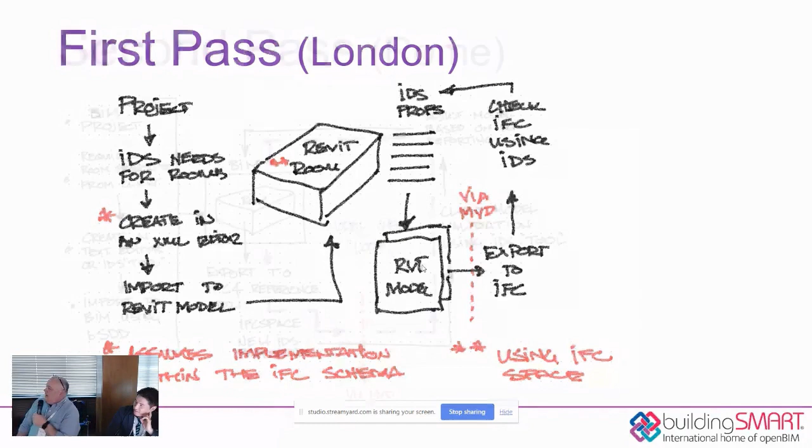Let's do a class, I said, okay, I'll do a class. And then later he's like, well, what are you going to do? Because we got a bunch of IDS classes, so it's got to be really good. And I'm like, well, it's going to be really simple. So...

I took another shot at talking with people at the conference. I went to some of the master class sessions. Mirbek and I have been talking, Leon and I have been talking. And so I kind of came up with a second pass at this sort of workflow that I would give to someone who sits in my office to explain what it is we're trying to do with this IDS and bSDD workflow using IFCs and MVDs. And if anybody in here knows more than I do, which is probably most of you, and you want to comment or correct me, feel free. I have thick skin, I don't care. So let's look at a few of these pieces.

So you can go to the next slide there, Mirbek. Excellent. So at the very inception of this, I've got some model in an authoring tool. It's, you know, where I come from, I'm using Revit, but it could be anything. So you've got your project, and then I made this.

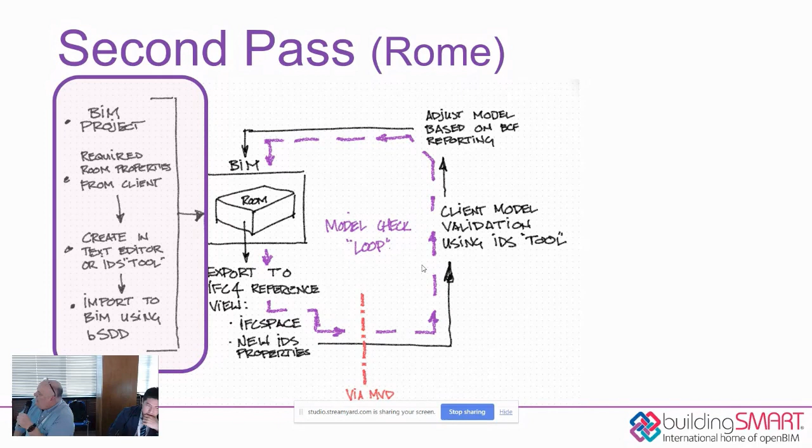Boy, it's almost too hard for me to read from here, but I should know it. The first one, I'm going to stand up a little bit, right over here.

So the first ones are just the required room properties that we might get from a client. They might say to us, we need these things. Mirbek's got a bunch that he's already put in there. We're doing our examples using IFC space, so a room from Revit, which we map to IFC space when we export. So they might come to us and say, we have all these requirements for your room, we need to make sure we're getting all that data in, and then you need to give it back to us so we can check it.

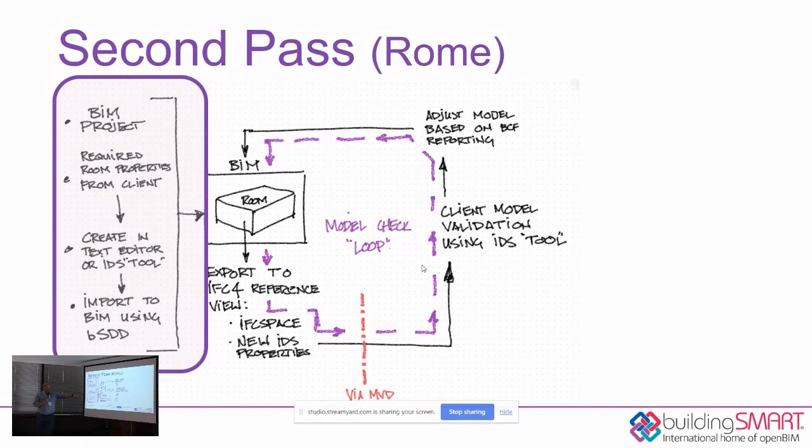So we can create that in a text editor or an IDS tool - I'm using air quotes because there isn't really a tool yet. We've talked in other sessions that there are some kinds of tools starting to be made. I tried to download one the other day, but it's only in Dutch, so I couldn't use it because my Dutch is so bad. And then we use bSDD to import that into the authoring tool, so we get those parameters in there so we can start to add those things.

You can go to the next slide. So we've got our model there, and that model contains one or more rooms. Are we doing a kitchen, or just a space? We're doing a space that's a kitchen? All right, we're just doing a space.

Yeah, so from there, next slide - we export this through IFC4 reference view. I put in IFC4 back when we did that, but for today's example we use 2x3 coordination view. That would export all of the standard kind of IFC properties and some of the new IDS properties that we might have gotten from the client. So those come out, and we export those via an MVD of some kind.

So we've got all these different MVDs, which are again a subset of IFC, and those go out to our client, who then takes that model and validates it using some other tool, some IDS tool. And then we create a loop - we take that BCF report, in this case put it back into our model, make amendments, make changes, and keep doing this loop until things get resolved.

I think when Menos was talking, he said he does all the modeling, all this stuff himself, and he did it like four or five times over the course of a project, just to get that thing through again and make sure everything they're tracking is correct. In this case it's rooms, but whatever we're tracking is being continually checked throughout the life of the project.

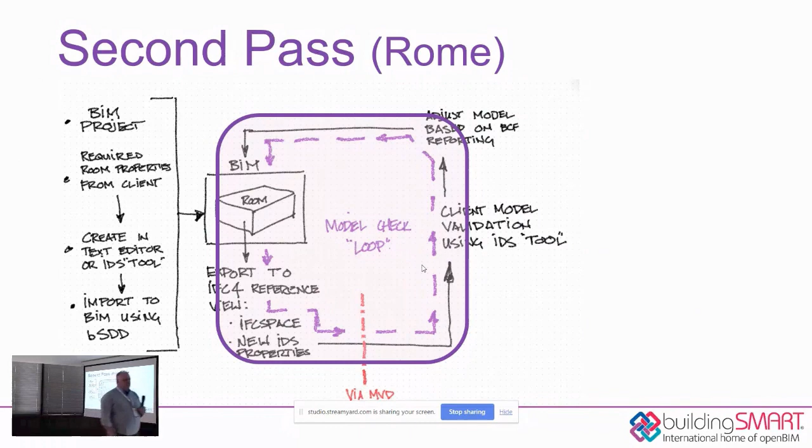So what else we got? Oh, what? It's like Mirbek time. While he's doing that, did anybody have anything they wanted to add? We've got a traveling mic, Artur, or anybody who wanted to talk. The last thing I want to do is put out information that I think is right but isn't.

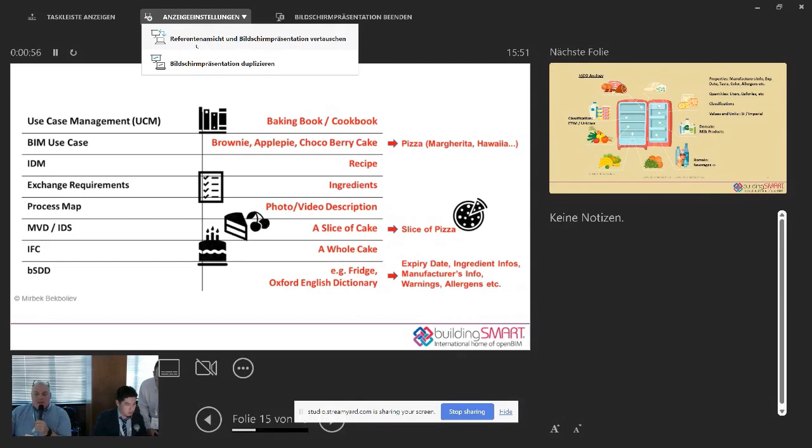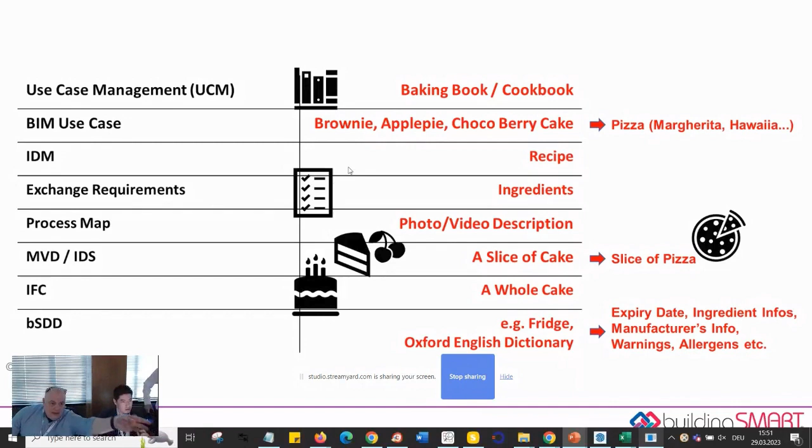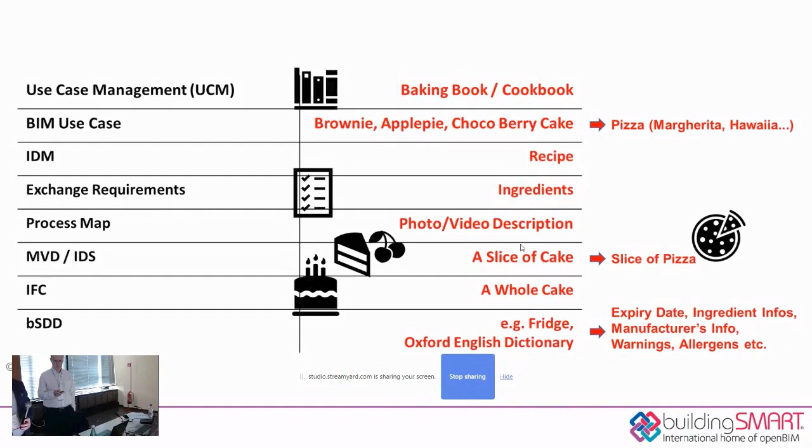Yeah, please, thank you. Okay, I don't... but what? Maybe I'm working on it. Okay, sorry, and not on BSDD, but yeah, I'm the BSDD new product manager. All of you said more or less, yeah, this is what it is. Yeah, this is correct. One comment just to avoid confusion in case somebody understands it this way - yeah, BSDD is supporting both IDS and IFC. It's not like a tool to bring this IDS content to IFC, it's a reference library where you can put meaning. But yeah, I just wanted to add this to what you said.

Yeah, all right, so thank you. You want this one? Yeah, I think we can use it for question and answers. Okay, I'll do the Q&A. It's muted. Okay, so shall I also get up? You can simply press this one. Okay, I can. Strange way. Okay, so I don't have to introduce myself.

You already did. So yesterday I had a chance and honor to join Artur's masterclass meeting where everyone presented their examples.

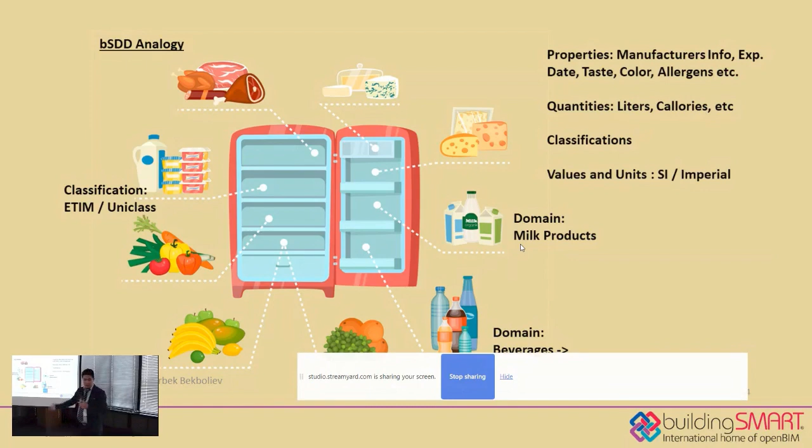So I took a chance to merge that was David's idea and bring the additional step I had. I will simply repeat again. Can you go back once?

So you already mentioned what these acronyms mean, and now I will give you an analogy for all these acronyms. In Italy, we all love cooking, and in general everyone loves cooking. This is the easiest way to understand.

Why we need some use cases: I will show you one specific use case that we will discuss today, and we will try it on one model. This use case is like a recipe, right?

Your recipe, you need to know how to model, you need to know your ingredients. In case you bake a pizza, you definitely know your model, you definitely know your processes. All the processes should happen in a timely manner. Imagine you forgot your pizza in your oven, it will burn out, right?

It's the same way like in a construction site, you pour your concrete, it should be in a timely manner. How much, at what time, who is delivering that, the processes should be the same way. So all these ingredients, you can simplify and explain to your colleagues, to everyone, even without a technical background.

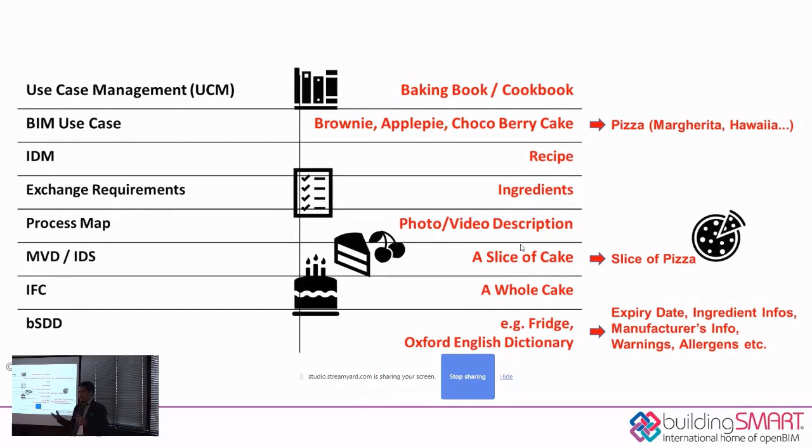That's the simple thing. We had a task from Artur where he asked what we understand as bSDD, and that was the next slide. I understand bSDD as a fridge. He had, I think it was a blog, right? I think it was a blog. It gave a real cool example of how to use bSDD with apples.

So it's like vegetables and fruits, a domain. If you have a domain vegetables and fruits, then they belong to a fridge, right? Not everything, but a domain like dairy, a milk product, will definitely be stored, unless it's a different type of milk, but you have some domains you can definitely specify.

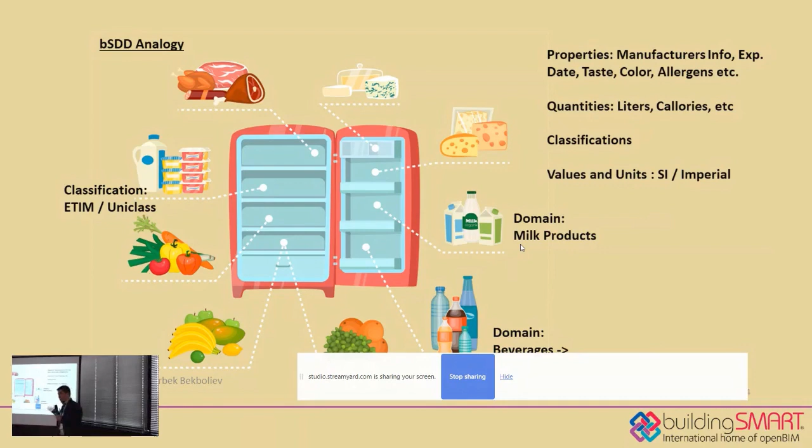And all that specification, you have properties, right? Milk products have an expiring date. If you use it later, maybe you'll have stomach problems, but still, all those objects, also in the construction industry, you have your specifications, your properties, your classification, and that's what we're going to do now, and the display.

We were inspired - myself, Gianluca, Genoa, Jeff Roulette - we had a chance to present one use case last time in Montreal, previously describing what we were focusing on with BCF, how to use BCF for a specific reason. Today I extended that with bSDD. How do we bring all these things together?

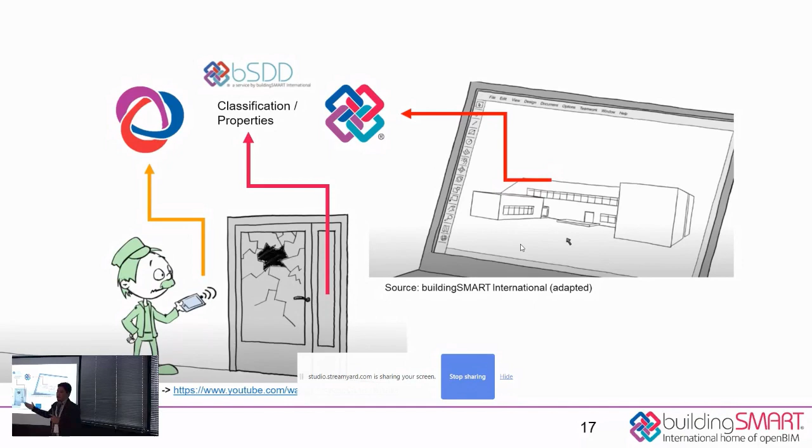And then you can track, of course, you put your PDTs. If you have PDTs, you can use that directly and say, okay, actually I don't need that kind of door anymore, I can choose another door from another manufacturer, and I can put a specification and open a tendering if it's a public school, whatever. So that was an inspiration.

Now next, you can use IFC 4.3. It's a new one - I just want to let you know, if you've heard many times, there were even sessions on IFC 4.3 - that currently, all that new information is stored also as a domain in bSDD. You can find it, you can map it.

And now I will give you a real example, let's start with an example. We will take an example - this is a use case we published recently.

Feel free to go - I think this is, can you press the hide there? Just give me a second. No, go back, there's a control. Oh, that was not a good idea. No, I don't think so.

Okay, so this is a use case with addressed BCF, using it for sustainability consulting.

There's small companies or small individuals even, trying to bring all that together for retrofit projects. Why? Now explaining why retrofit projects. Worldwide, how many buildings are already built? You need to renovate them, someone to retrofit them. And of course, some initiatives, government and international organization initiatives, are trying to bring them forward with incentives.

Next slide, please. Next. Yeah, now this is a case where I was specifically using air tightness. Why air tightness? Because in many standards building air tightness is very vital. It's 9%. If you improve air tightness, you have a 9% energy efficiency gain just for air tightness. Imagine you have other things like insulation, improved thermal bridge-free construction, and so on.

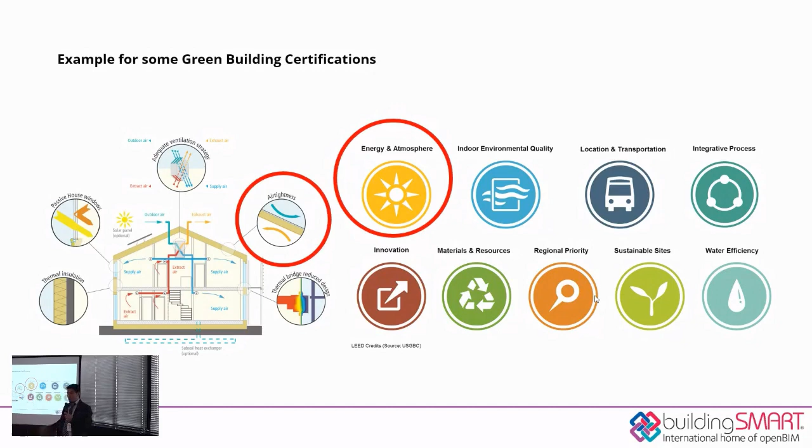And this is for LEED certification. This is a standard, like the passive house standard, local standards. They're everywhere in the European Union. You need to have a blower door test done. In the US, especially for the US Army, you even have a specification. You must do this blower door test.

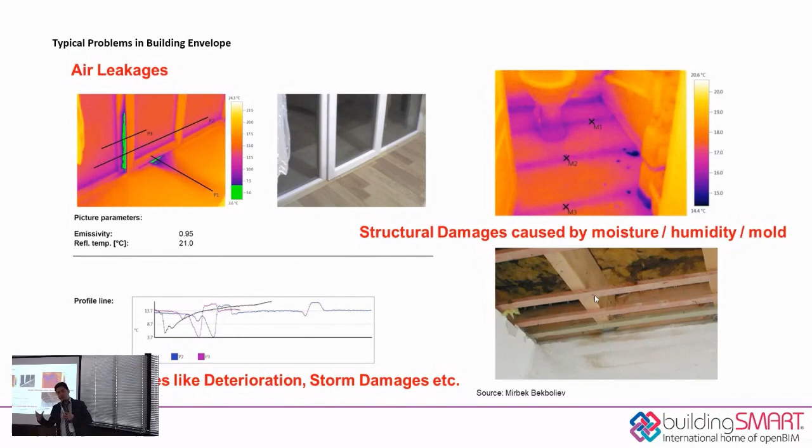Next one. Why air tightness? You see those issues like draft, like mold, simple classical ones. You can document them with thermal bridge cameras. Sorry, thermal bridges with a thermal camera. It's infrared thermal imaging. Yeah, that was a requirement that we stored on UCM.

If I'm too excited and too fast, please tell me. Please count down. Yeah, they go back. All right. Yeah, we have actually. Yes, yesterday I had 15 minutes. That's why, today I have more time, so I will relax now. Whew. I'll breathe. Take your time, Mirbek. We got all the time in the world. Sorry. We got all the time in the world. Just take your time. Okay. If something is not clear, please ask me directly. We can leave it as a discussion. But if something is not clear, I can at least give you some clarity.

So this is a simple requirement: how to perform building air tightness documentation, and what you need to perform a blower door test. And you need not only the blower door test; it's an ISO standard. It's also an EN norm. And in the European Union, you need to do that according to the standard. ASTM, I guess, is a standard in the US that you need. There are protocols like USACE, the United States Army Corps of Engineers. They also have some specific document that I really had to perform once.

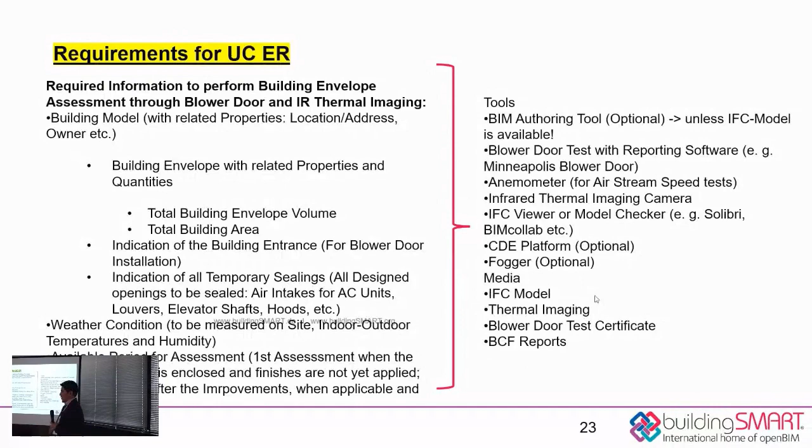Really tough thing. You need to have specific tools like a thermal camera, right? A normal camera, to document them. You need the blower door itself. You need maybe a BIM authoring tool because you need the models. Classically, on a construction site, you go there. What I got, I have a paper. In reality, right? You mark them. You say, I have a problem on the first floor.

That's not the case. So in use case management, we put our simple requirements, like what I need to have, at least to mark my requirements in the model, and where those problems may occur, classically windows. If you look at windows, you definitely need to map them. You have, of course, property sets. You can use them. You can profile from property sets. You have related ones like infiltration. You have the property set condition. You can assess conditions, why they're related, and you have site.

When you go to a site to perform a blower door test, it's according to these requirements. You put in inputs, right? You have your inputs. You have to input the address. You have to register the current condition, weather condition, because it's related: pressure, temperature, and so on. Next slide, please.

And which building, as building criteria, like I said, building use, what the building type is, and space common that we're going to discuss today. Thermal loads might be interesting, because of what loads we'll have, occupancy requirements. Next, please. And of course, the most important for me, really a vital one, is base quantities. I need to know the air volume that I need to push into that building.

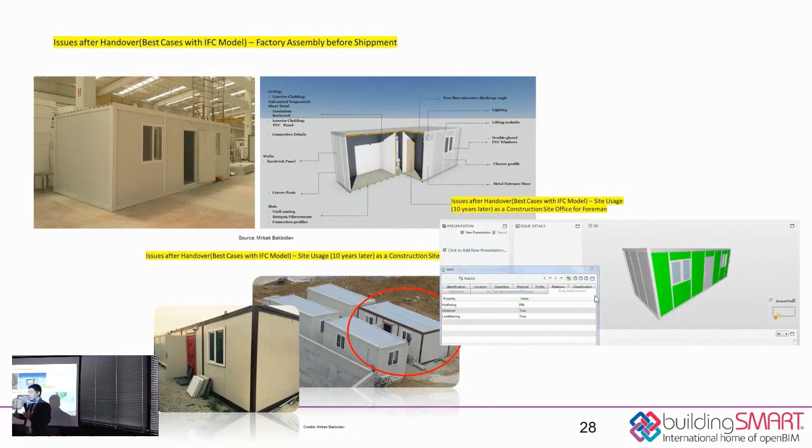So this is a building that we will show later on. As you can see, there's already a blower test installed. We run simulation later on. And this building was, of course, an example, also a real example, a new one on the construction site. That's an interesting point of prefabrication. The current ones, according to new standards, require that you do that blower test already at the factory before it left the building. So with the new standards, you have more opportunities. But the old ones, like 10 years old, will have a lot of issues like this.

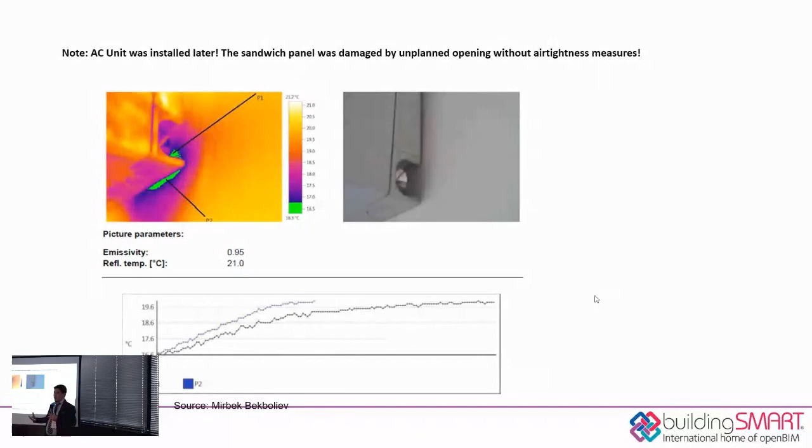As you can see, they didn't have AC units, so they have a lot of workers. They simply drill a hole and put the AC unit in, but they are not energy experts. They forgot to seal it properly. So you have a leakage, and air leakage is money, because you are conditioning that air in the building. It's maybe a hot climate, and it will simply be leaking through, and you spend a lot of money. Same for windows, not the perfect windows, and so on.

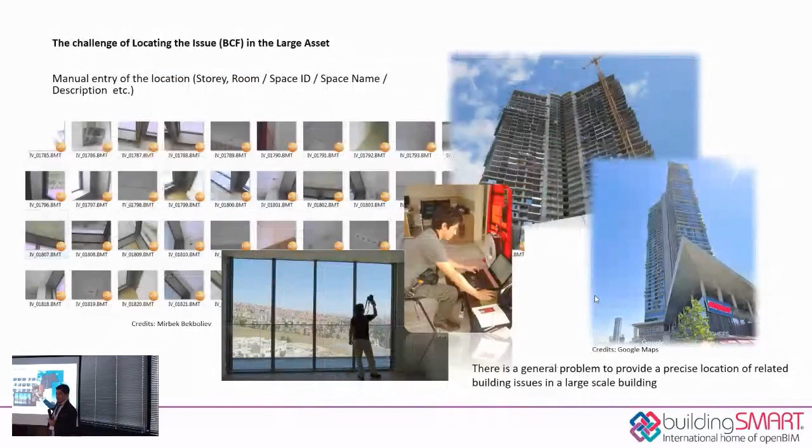Next one. Imagine that kind of building. Wow, that will be tricky to document all that kind of leakage, because even in small scale, it's still tricky. Imagine I did the blower test in 2010, and I left the company, or I was hit by a truck, whatever, right? Who knows where this thing occurred on that building?

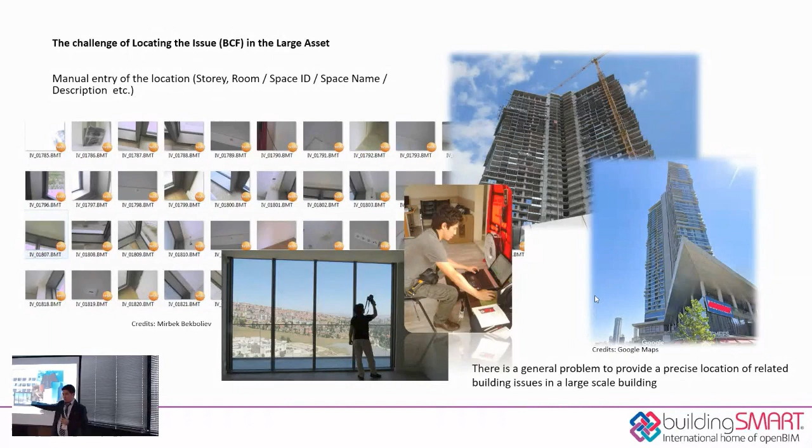Try to document. So the answer was BCF, because with BCF you map it to the specific location, storey. You choose exactly the building material, object. You say this material, or this window, was leaky, and I can directly go to the place and say they had a problem. We can make improvements and document that. So this is theory. Now I'll show you in reality.

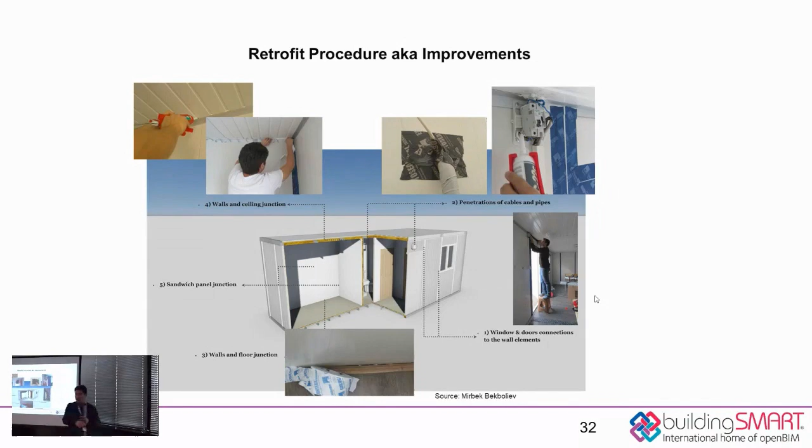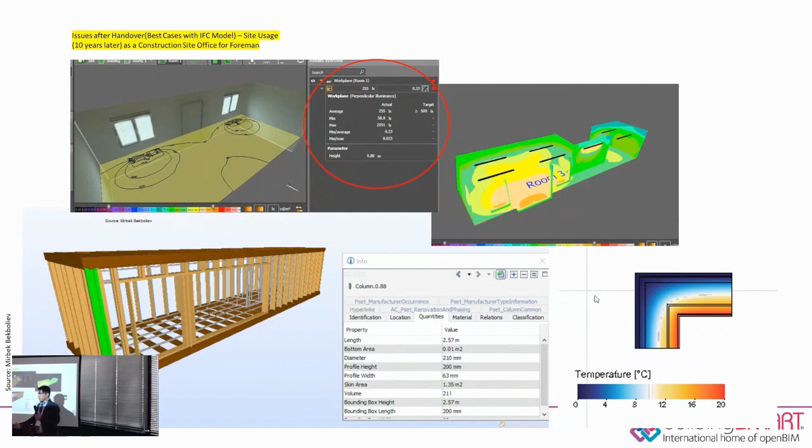Can you maybe install a skylight? Taking into account the skylight should later maybe be protected from sun, since it's a hot region. And you can perform other simulations like thermal imaging, or simply check if thermal-bridge-free construction was really applied in that building.

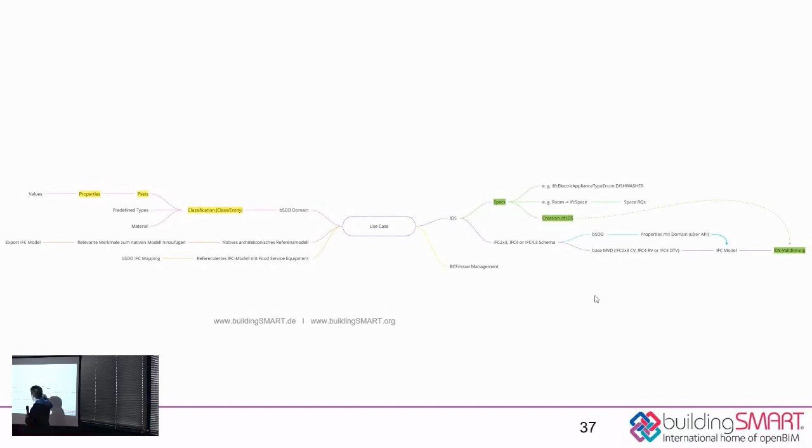So this you have to zoom out. I will not touch anything. I will not zoom. I will explain the workflow he already made, and David already showed you this loop. So this is actually a loop. No, sorry, it's the fancy version. Yeah, I will discuss that. We have the same thing, right? So we said we will bring you through those stages. So we will go now slowly into the next stage.

And I guess there's even a status in bSDD now that a domain has been approved or something like that. Arthur, you can confirm that? You can do it later. Let's do it later. So there is even a badge, I guess, you can check. It has been quality approved. So this is a good thing, because otherwise we have many domains here.

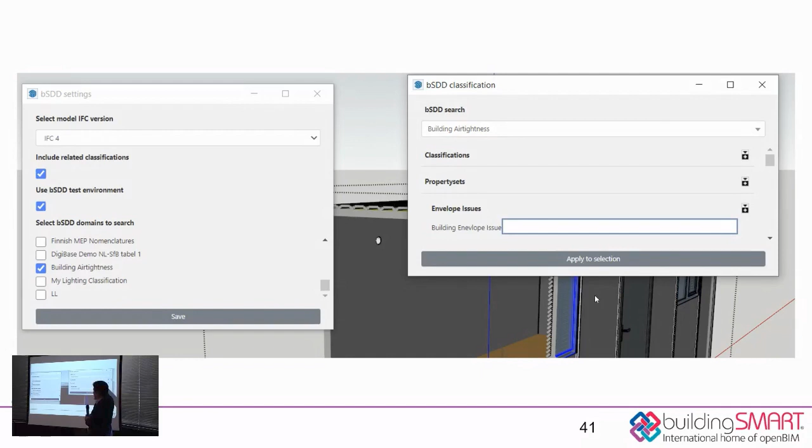Let's go further. There are different types of applications, a few of them implemented, like the SketchUp extension you have seen. IFC 4.3 is already available in bSDD, but the capability of software should always be taken into account, and currently IFC4 is the maximum in SketchUp. I can filter and say I have building airtightness as a domain. As soon as I filter my domain, I find my classification and those property issues. And then some other examples. I took one example from global warming potential.

As you can see, there are some limitations which you should know. I think the implementation software companies, after this feedback, will definitely think about how to improve that part. Because, remember, I also did the same thing in bSDD. I mapped it with IfcBuilding, IfcWindow, door, space, and so on, right? The same thing here, global warming potential. They applied global warming potential, EPD indicators, for the building, window, wall, slab, IfcBuildingElementPart, and roof.

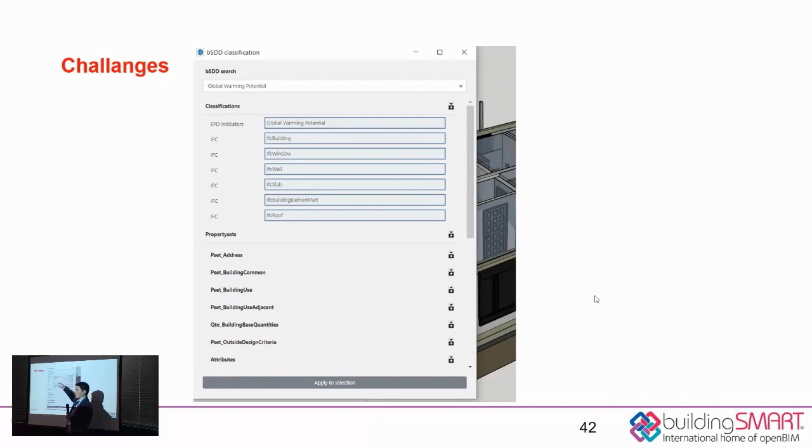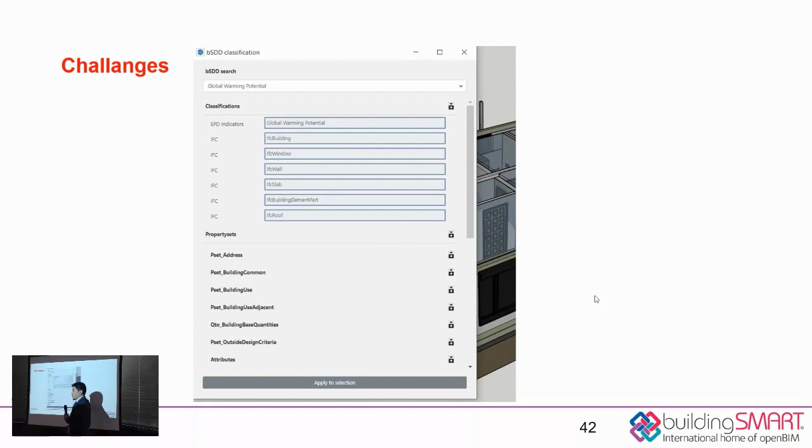If you map that, you choose this and bring it to the model, and you click on the window, it will not be applied. Maybe the first thing it will apply to is the building, but it's of course a mapping issue, or let's say a bug. I will not say it's a bug; some improvements are needed. This part should be enumerated values. You choose as a user what is applicable. Let's say in my case it's a crack, I choose crack and map that with my real issue. That's an example.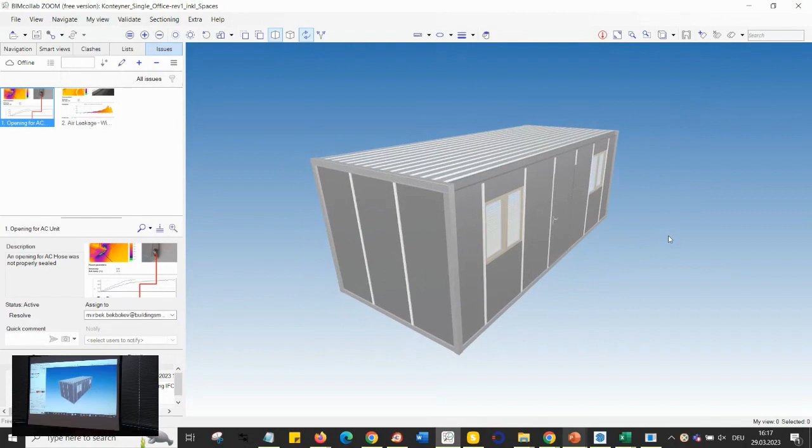You see that building, right? I was not telling fairy tales. It exists. And of course, it's a replication. The old file was lost, and some things I had to check. This is a normal building that we had, the same as on the construction site, exactly one-to-one. But one thing I had to tell you. You remember this problem, right? We had an issue with an opening. I would call it a problem because they drilled a hole that was not supposed to be there.

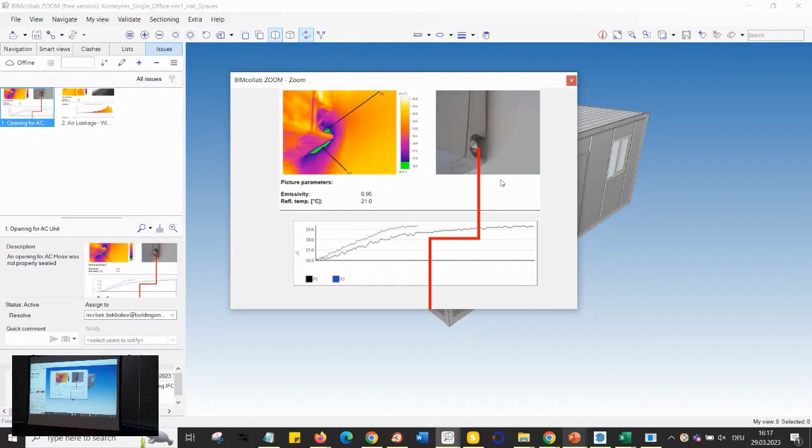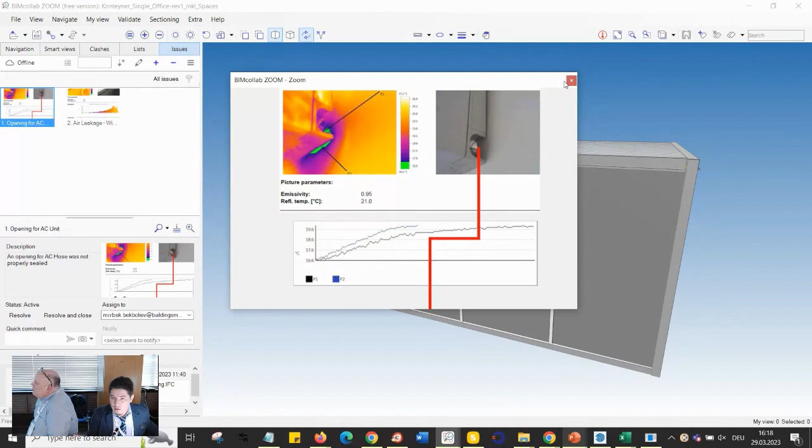And plus, if you do an opening, how are you going to model that opening in the model? You use provision for void, or you simply use IfcOpeningElement. It can be both ways. And what is the positive side of doing so? You can directly map them and say whether it was sealed or not. We can do that as well. That was one example, one issue.

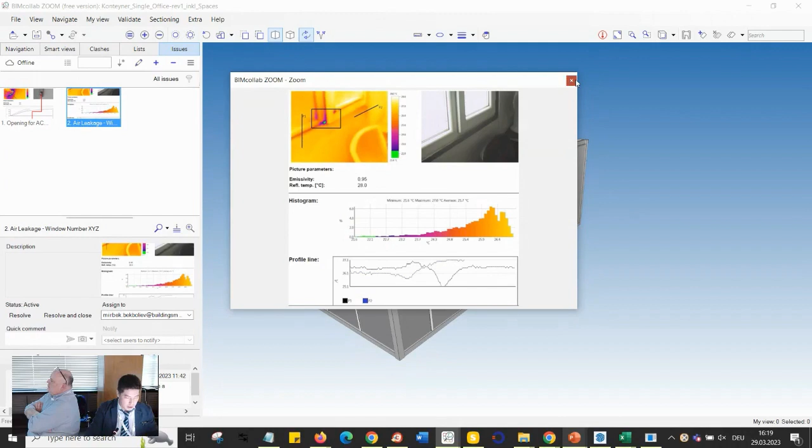We have the same issue, like you have seen, the gaskets, it's classical. It may even be here in the other building. So you have a chance to bring that part and tell the housekeeper the window should be replaced, or you change the gaskets. The easiest, cheapest way is to change the gaskets. But as the renovation goes on, you need to do that. But how did I do it? I simply did it through bSDD and BCF, and brought it to the contractor or whoever is sitting in that container building. Now I go the same way. You can see, right?

One thing I should mention here: I didn't use servers, so this is just an offline version. It can be really automated, but imagine me as an airtightness engineer or a sustainability consultant. I don't use BIM applications or BIM authoring tools every day, or even I'm a client. I don't need that, but I need to see my building. If I require IFC as a delivery method, at the end I have my as-built model, so I will have it with a normal IFC viewer.

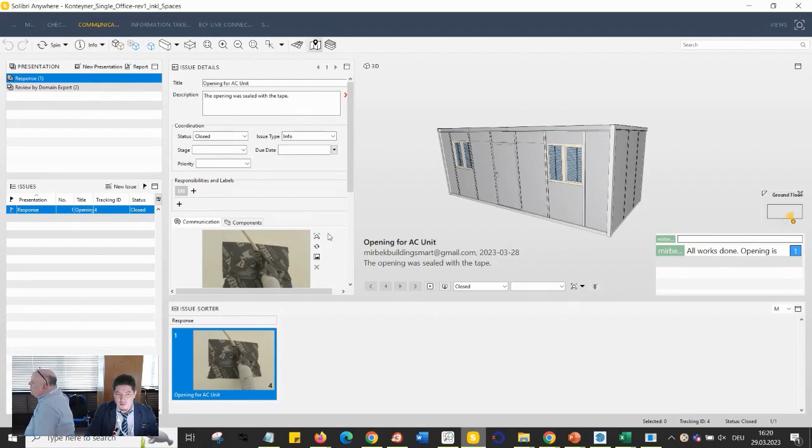But the advantage of BCF is that it can be sent together with a model, and you can simply import that part and directly see those issues or whatever documentation there was. So you bring that documentation. As you can see, I, as an airtightness engineer or sustainability consultant, did my job.

I gave my response, and I said the opening is sealed, right? And the status is the issue is closed. So I'm done. In reality, if a big company has facility management, they probably will have an issue management platform, and the issue will already be tracked there. Is it open? Later on, it's closed.

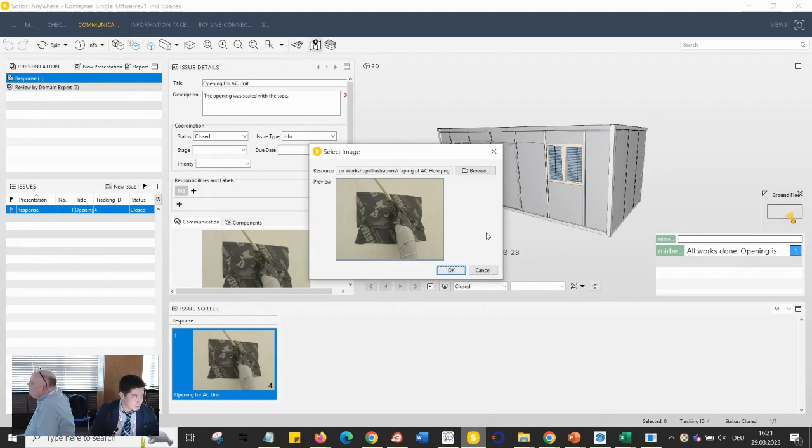I did my job. I sealed that thing by myself. I definitely can confirm that, and when it was sealed. So if something happens, then you can sue that guy. But that is a document. And the outcome of that use case that we published was not only IFC transport information, but also BCF. BCF is a really good, cool thing when you do that for dynamic information, because IFC is static.

As soon as you build your house, let's say, you pay the architect, it's sent, it's ready. If you have a lot of money, you can send the architect another contract, like, can you update me on that hole in the building? It will be, of course, additional resources. But for dynamics, you need to do something.

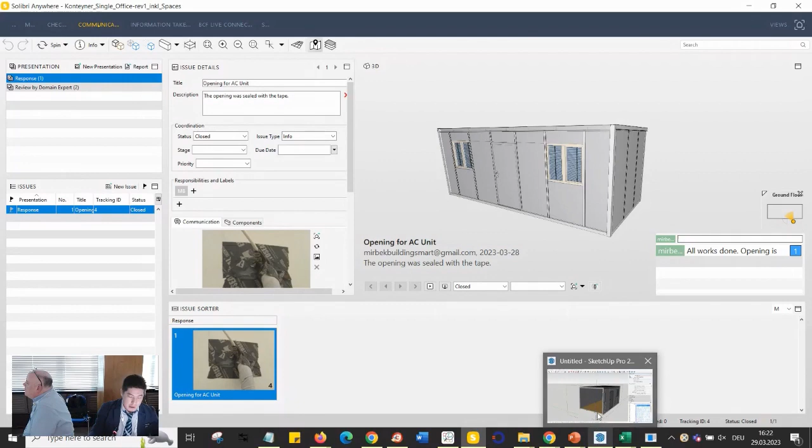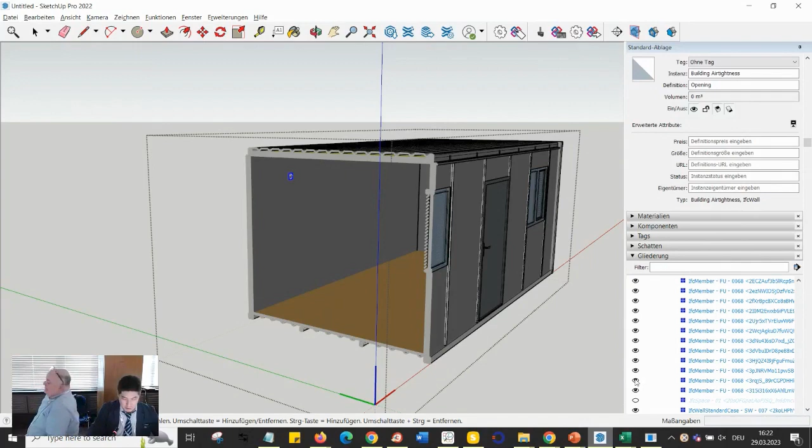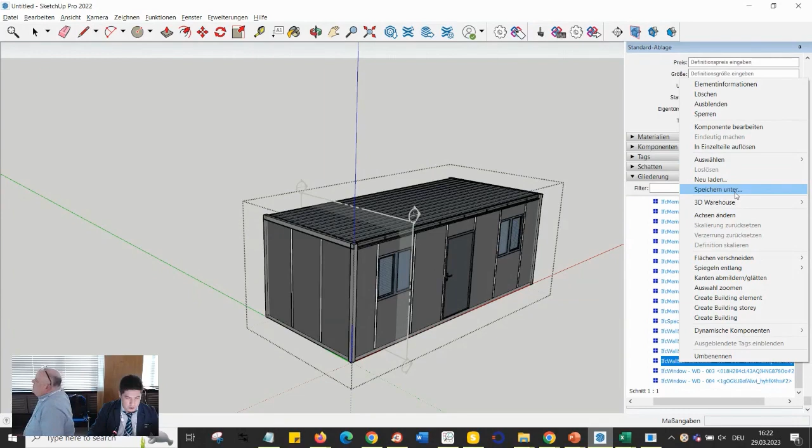Let's make it. I will simply check. So we will simply hide some windows or doors. It's up to you. Or we simply directly choose a window, right? We are free to do so. As you can see, we have this API, like a plugin that connects directly to bSDD. You remember I mentioned that one.

We have IFC4 as a schema, and IFC 2x3 as well. Make it a little bit to the left. And we have domains. As you can see, there are dozens of domains. Some of them are already published, some of them are test domains. That's why it's still visible. And that's a test domain that we created for building airtightness.

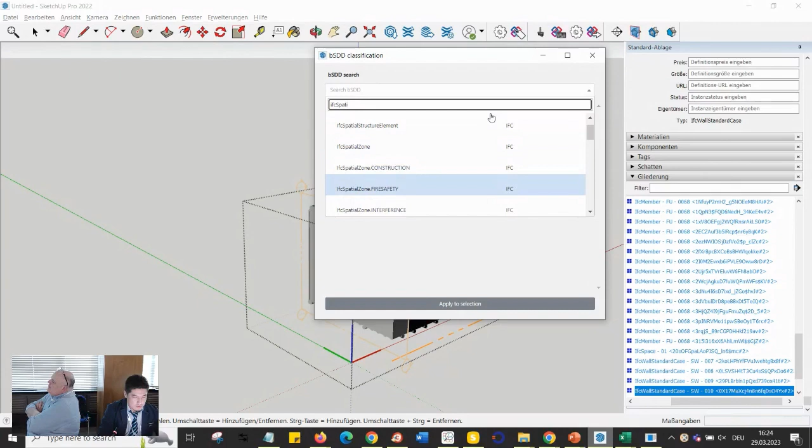I can simply open the other one, IFC, because we don't know which class or entity we should use. So I simply made an experiment. I need IFC spatial zone. There was a session today, the previous session. Do we have a spatial zone? I can choose fire safety that we discussed today, and we have IFC fire safety without properties.

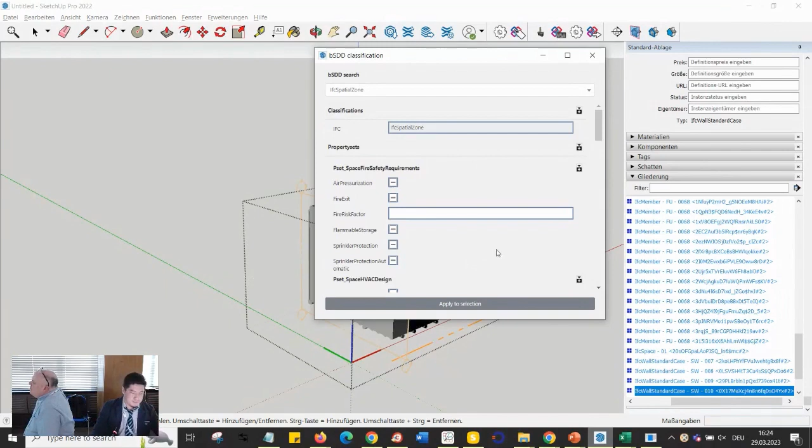Some predefined types have properties, right? Some not. We can choose maybe directly IFC spatial zone, then we can directly see the properties. Yeah, those properties. It's air pressurization. Can we do that? Does it have fire safety? Yes, we can. But first of all, I need to choose the space. This is my space. In a second. Yeah, there you are.

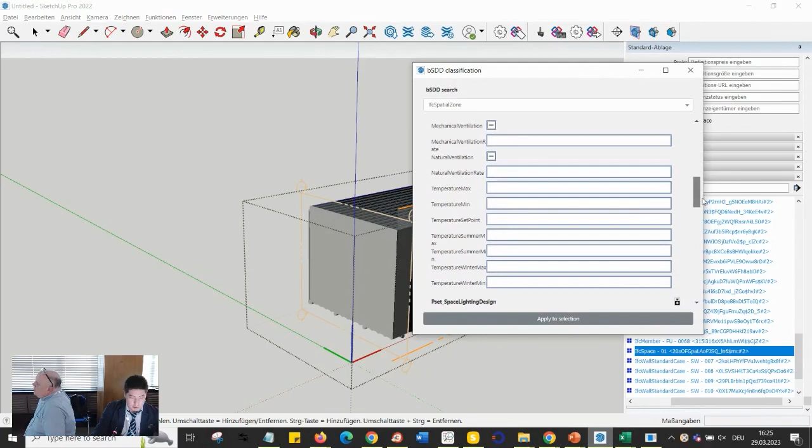So if we want to have a sprinkler system or other Psets, I simply can add my information. I can map them. All these properties are already available, right? So I don't need to type them. It would be a best example also in Revit, and then I spare my time from all this manual work. If you want custom properties, you need to spend time in Revit. So it indeed helps.

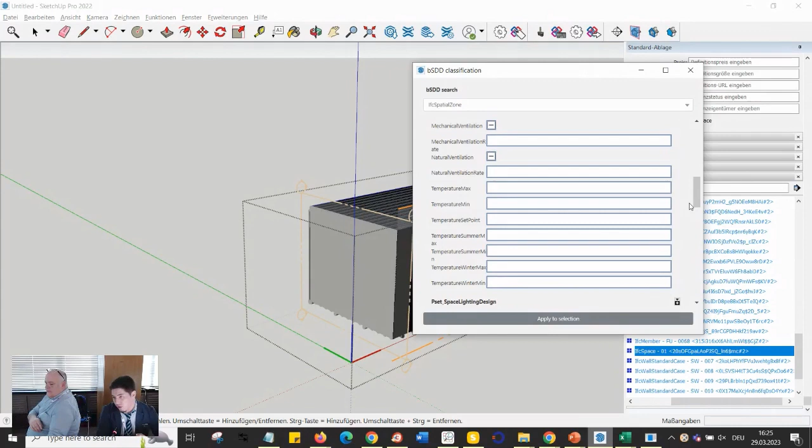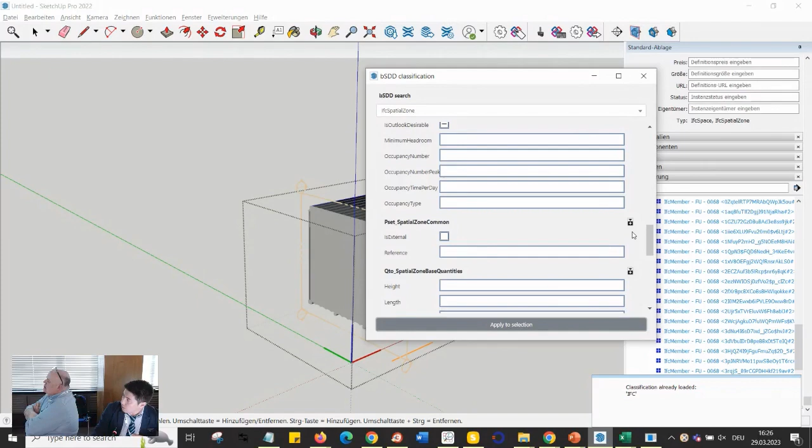That's a really important message to software vendors. Please implement it in other software as well. This is a really cool thing when you bring bSDD together. And now I can simply check, okay, Pset spatial zone common, is it external? No, it's not external. So I will simply map and say apply. Now what we see, it was previously IFC space, right? I now have a spatial zone.

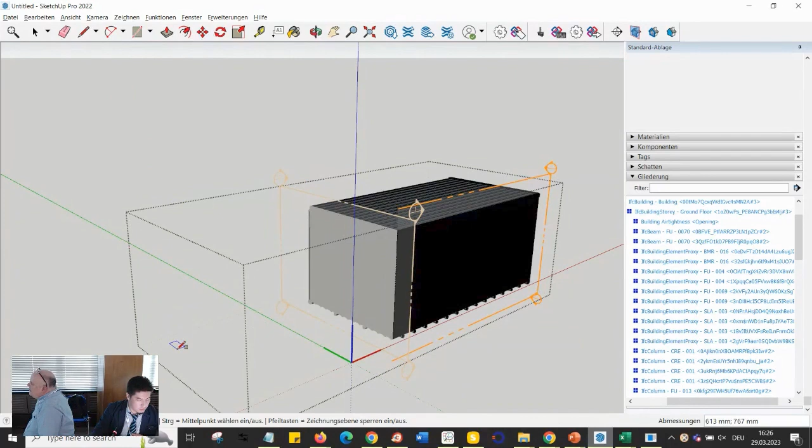Or I'll do this as a completely new one next to it. I can simply create a new shape, a simple space next to the building, like a column maybe. It's up to us, not the best way. This one. I can create my model out of nothing and see, this is an IFC spatial zone, right? I just wanted to directly map it.

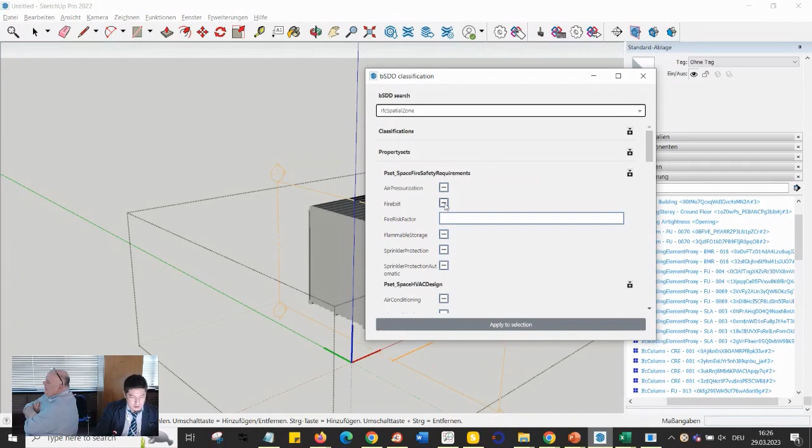IFC spatial zone. Is it external? Is it a fire safety, a fire exit? No. So is it air conditioned? No, it's external, I just wanted to keep a space for that, and it has natural ventilation. Yeah, theoretically it's external, that's why I need to apply all that into it.

But before that, in some cases we need to create a component, let's say a spatial zone. That's what I forgot to do. So...

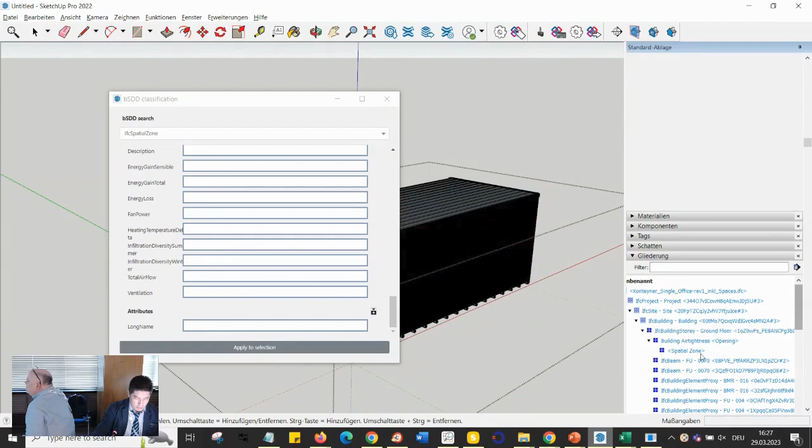As a spatial zone, as you can see, give me a second to show all materials. I can choose that one and apply all these properties. Apply selection. Takes a little bit of a moment.

As a result, we have the type already applied, IFC spatial zone. So it's good for mapping. I don't need to spend my time if I'm not sure, I'm really new to this world, especially using SketchUp.

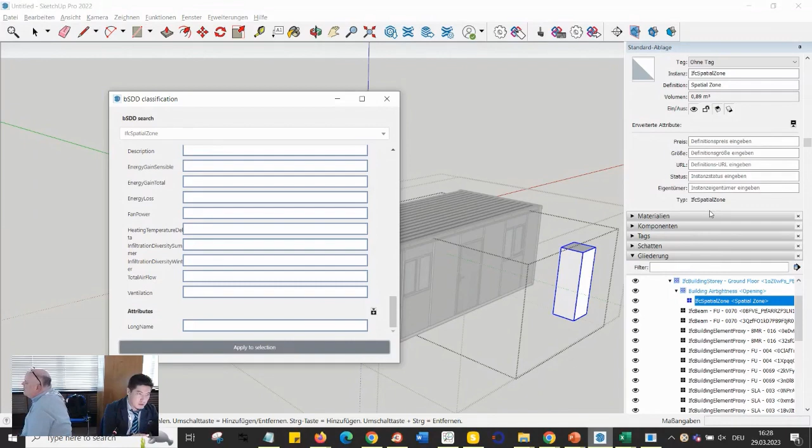Many architects, many small consultant firms still use SketchUp nowadays, especially for landscape architecture. Me, as a sustainable consultant, I can use SketchUp as well, so on a daily basis it's really good. Of course, you have some limitations, but you need to do this mapping.

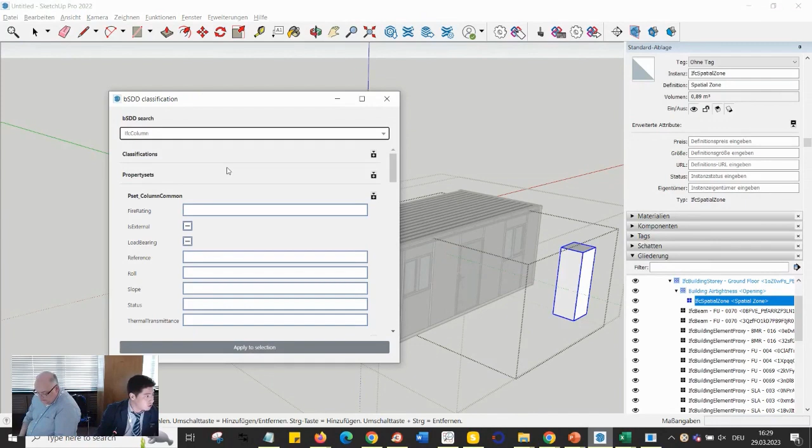If I'm not familiar, but I know the keywords I need, like if I know zones, I can simply write down a zone. Or in this case it can be column, but I don't know how it's mapped in IFC, so I need to find that, and I don't know which property set has IFC column, right? I can simply go and say PSet column common, use that, fill in the requirements we identified in IDS, and directly map and bring my properties into the model.

So now I will switch back to IDS slowly. Before any questions regarding this workflow, was it clear enough? Do you have any specific questions?

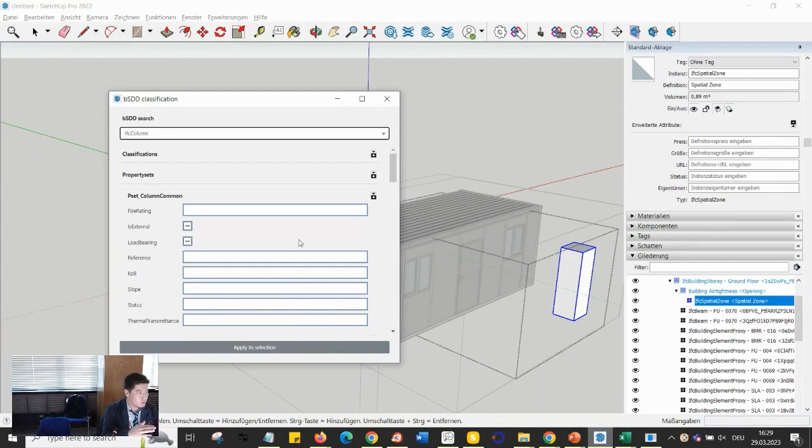Yeah, I do, I see there's a question now. Was it clear? Should we go to the slides again and explain some points where we were not clear enough? Let's see what questions we get, Mirbek. We've got a couple of questions online from Roger Grant as well, but let's take the one in the room first. All right, got 20 minutes, Mirbek. Sorry, yeah.

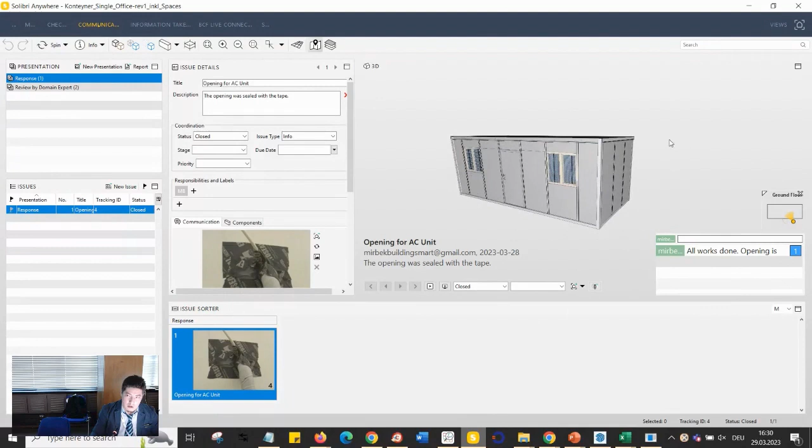So I had a question. You were showing the use case where you took some pictures and communicated by BCF. Were you using some specific application? What's the workflow? Because usually if we go through the building site we have hundreds of photos, and I need to immediately post it. Currently we are using FieldWire for that. I'm just wondering how you bridge this gap, 2D and 3D together.

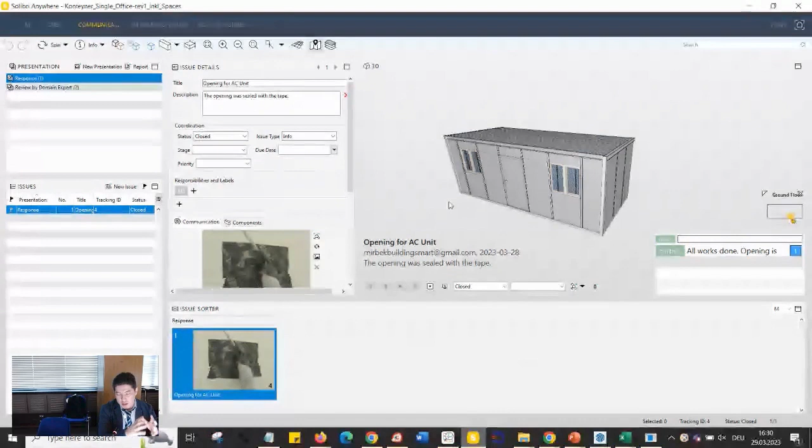Well, that's a great question. I did this also with the building, you point a really good point. It's difficult, you need to have, of course, you bring your iPad or your tablet, whatever viewer you have, and you can create your BCF directly at the same time. But the prerequisite that I forgot to mention, I think in the use case management, let me go back to that use case and check quickly, switch to the PowerPoint presentation.

Here, it was exactly from the video. As a matter of fact, you need a building, as I see it already, I mean, like we have a building in construction phase, we have IFC files. Usually our managers on the building site are still using FieldWire. We would love to bring all these clash detections and problems into IFC files. So FieldWire is really not supporting that, and I was wondering, maybe you know a better way to go through the building, take hundreds of photos, and immediately post them.

Basically, okay, here you have Solibri, you're showing other programs as well that have the possibility to show those pictures, but usually that workflow is kind of through the computer, and site managers usually use iPads or iPhones or something like that. I know the solution like Dalux, I think they're also using pictures directly to communicate that. They can.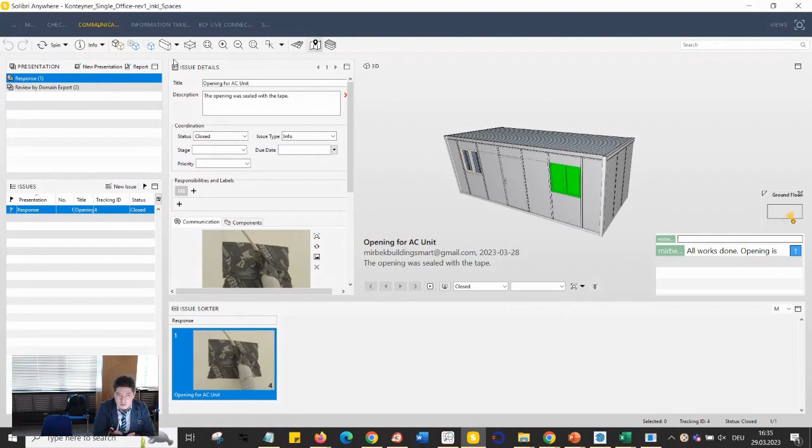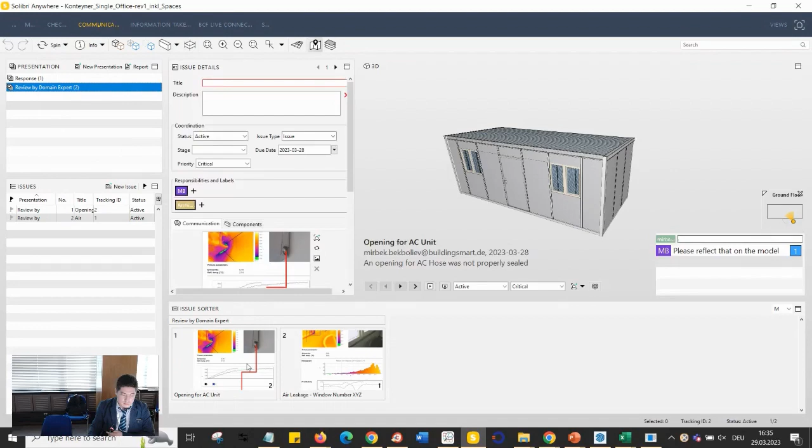We had a discussion with colleagues about that - in the public sector we are not supposed to, and we kind of don't want to see specific materials from manufacturers. In previous sessions you were talking about that kind of information being owned by manufacturers, and you're linking that information with specific materials and manufacturers. How do you see that implemented in the public sector, where you are trying to avoid specifying specific materials?

I will try to answer both if you allow me, Mirbek. I think the first one I can answer just by saying that we have to distinguish software implementation from standards. We have openBIM standards such as BCF.

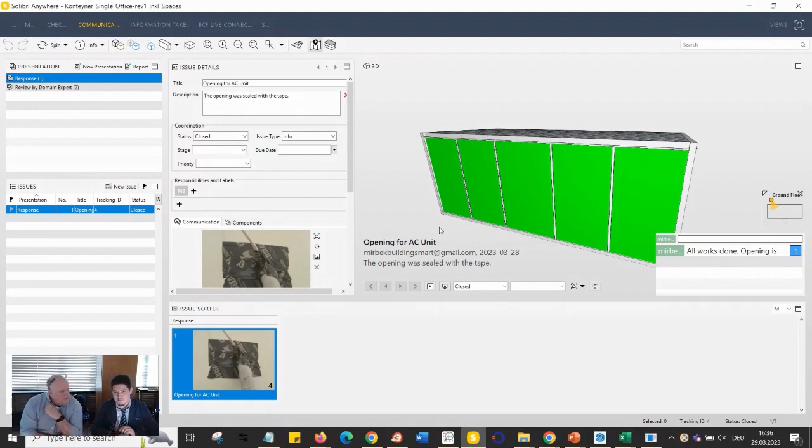In BCF there are a lot of possibilities for what you could do. You can attach a topic, you can attach it to objects, so you can specify which objects in your model are connected to it. You can specify a viewpoint, so you can put a camera where you want to point in your model. There are tools that support it - you can do it on your phone, on your tablet, on site. I don't want to favor any - there's Dalux, BIMcollab, many others. So yeah, BCF supports it. Software does not necessarily have to - there are many of them.

And the question about bSDD - basically, we don't want any manufacturer's data. bSDD is not for project or manufacturer's data. It is for agreeing on a shared understanding of concepts, such as what is concrete or what is watertight concrete - to share the concepts. For example, the road authorities in Finland use it to specify what they understand as, say, the upper layer. So they need to share it with stakeholders so everybody speaks the same language.

And it's more than just a dictionary, like you compare it - it's a bit more. It's like a reference library where you can put more information about the meaning of a concept than you can in a simple IFC parameter, because there you just have a name, and we can have different opinions about what this name means. But in bSDD you can specify what it is, how you measure it, what's the unit. There could be many different definitions of carbon footprint or global warming potential depending on what standards you follow. So yeah, bSDD is a place where you can put these definitions.

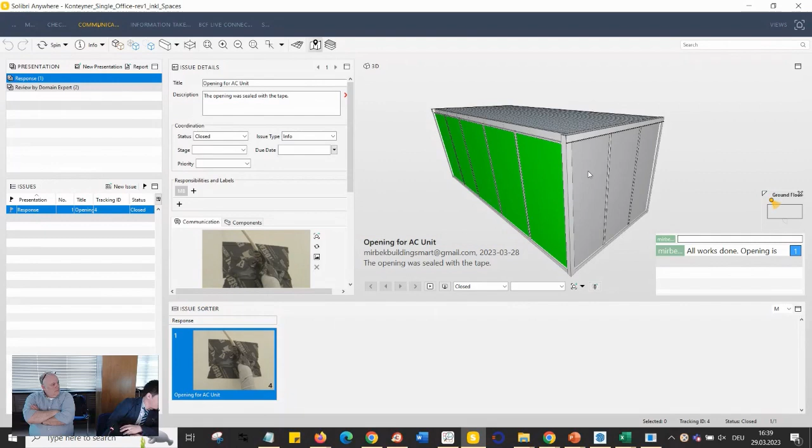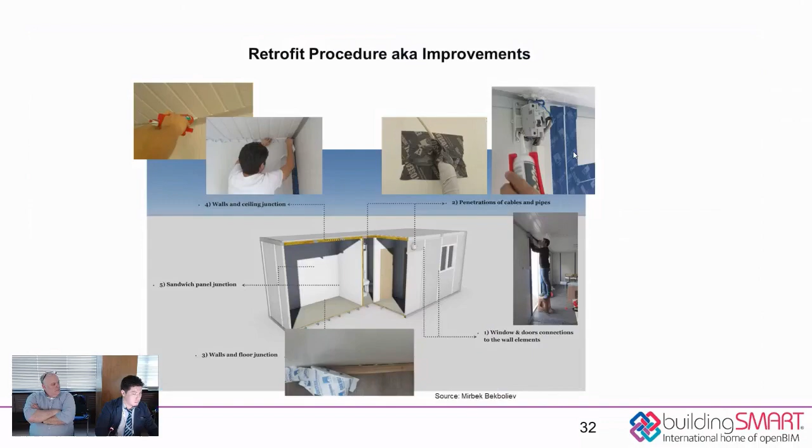Thanks Arthur, thanks Mirbek. We had a question about half an hour ago from Roger Grant, actually when you were talking about MVD, possibly at the start of the demo - you said that you could share the MVD with clients. Roger was asking, how would that work? Did I say that? Did you mean that you were going to share the MVD with clients? Perhaps not. No, no, I didn't.

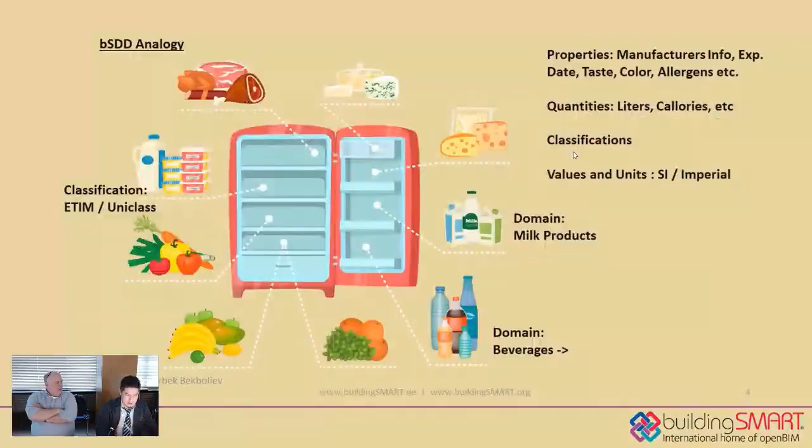And Roger was also - I might have said we shared data via an MVD, but no, I didn't say that. I didn't mention any MVD.

Okay, alright, well now we can simply explain here. You use MVD in your daily life if you're dealing with exporting, importing - you do that because it's classical, right? You know someone wants an IFC model, how do you do that? You export it. You have your Revit, you have your ArchiCAD, you have other BIM authoring tools, you go and export. You choose those MVDs, like classic IFC 2x3 coordination view, IFC 4 reference view, or design transfer view.

But they are basic ones, so it's like a must-have, and especially IFC 4 reference view is becoming a standard - certified, and many have applied and implemented it, so it's a good one to use as a reference. And you send your model through MVD, later on you validate it with IDS.

I think Arthur wants to add a comment there. Yeah, good point, I just wanted to add one more thing. I won't use this cake metaphor because I think it might be confusing to some, but basically MVD is more for technical implementation - you select a part of IFC so it's easier to implement. So if you have software only for roads, maybe there's no point in implementing roofs because it takes time and you don't need it. So it's to have a subset for a particular purpose. But I wouldn't put it on the same row as IDS because that's more for requiring specific things on the project - though it needs some improvements, of course.

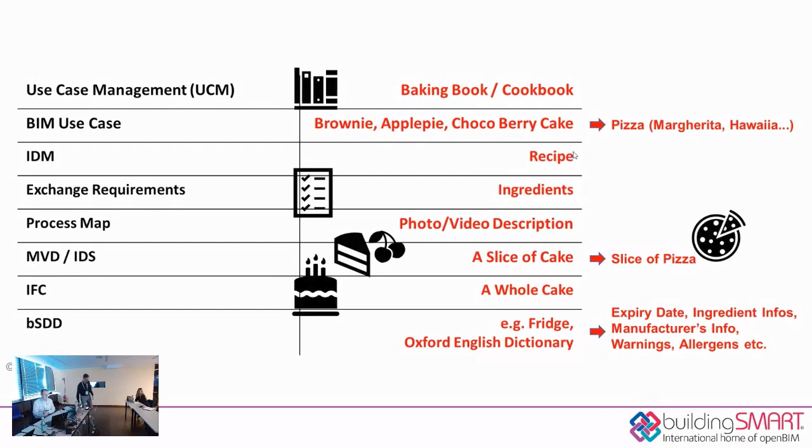Yeah, here as you can see I put not the whole piece of cake, because not everyone wants the whole piece of cake. A cake can have some - especially children say, I want it like this, I want only the part without cream, or I want only the topping, only the chocolate of that - children always express exactly what they want in that case. I want only cherries, right?

And exactly the same way in building construction, some say I need only the building envelope - I'm a sustainability consultant, I want to do energy simulation. I need to have the building envelope and related information, like U values or lambda thermal conductivity information regarding insulation. That's what we need - I don't need you to send me, I don't know, statics, that's not my interest. So this is exactly what we do with MVD.

Okay, so no other questions? Or do we have one question? No, we have no other questions online at this time. Are there any other thoughts, comments, or questions in the room that anyone would like to raise for Mirbek, Arthur?

I hope it was not confusing - so far it went smooth. If there's still something not clear, feel free to ask and we will discuss that. We have plenty of time.

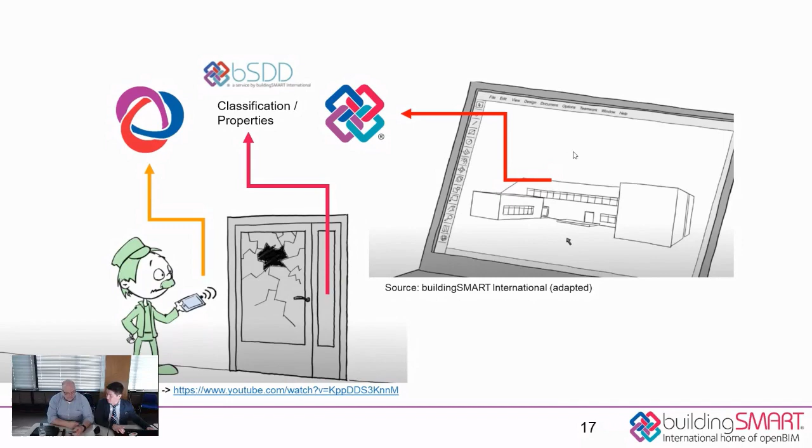Yeah okay, we'll make it a little bit early. So shall we continue now? Are there any more questions, or have you got any more information to show in the demo, Mirbek?

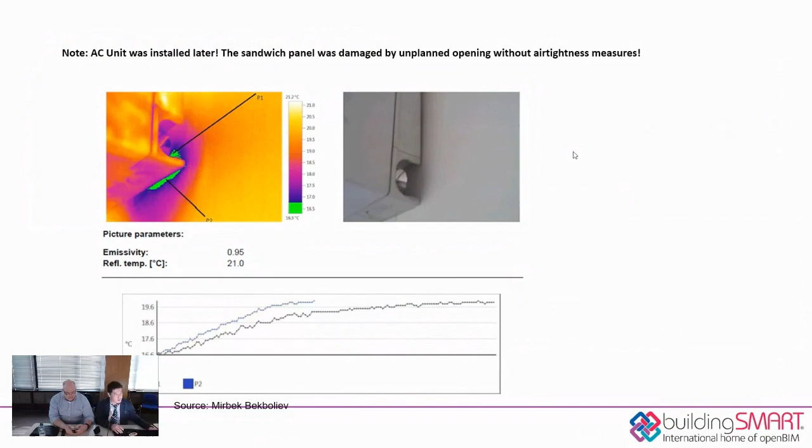Or are we - now I'll go to this part where you create IDS, and I will not dive really deep into that because it's still expected to be a candidate standard. Some improvement implementation is expected, that's why we will simply demonstrate some stuff that was already there, not that everyone speculates what we're talking about. I would give credit - I find it personally really great, what Arthur developed in the past, and it's still for demonstration, but it's a really good thing.

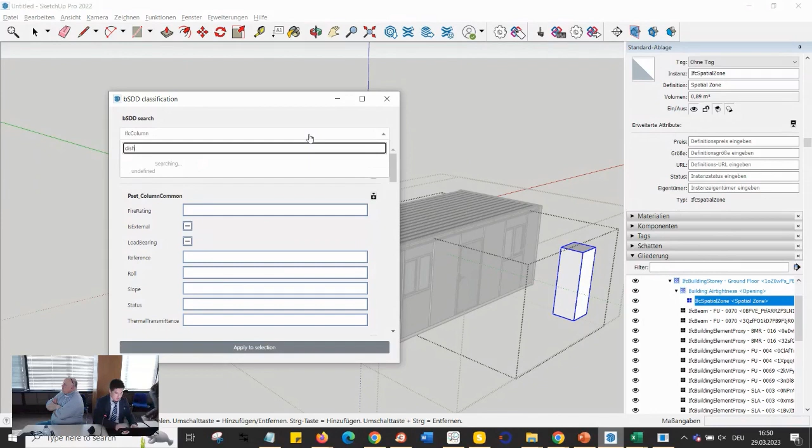You remember, I just wanted to give an example of a dishwasher in bSDD. That was exactly the point I was talking about. I choose this dishwasher, I go into dishwasher types, and if you choose dishwasher type, I will put here unset. Of course, in some cases, actually, these types should be a drop-down menu.

It's not a big problem. As I remember, the values were out of scope from bSDD. Again, we have to distinguish software implementation from the standards and services from buildingSMART. bSDD is not there to say this should be of this value. You can say it could be restricted to some range of values, or it could have some possible values, but it's not to say that a fridge should have 2 meters.

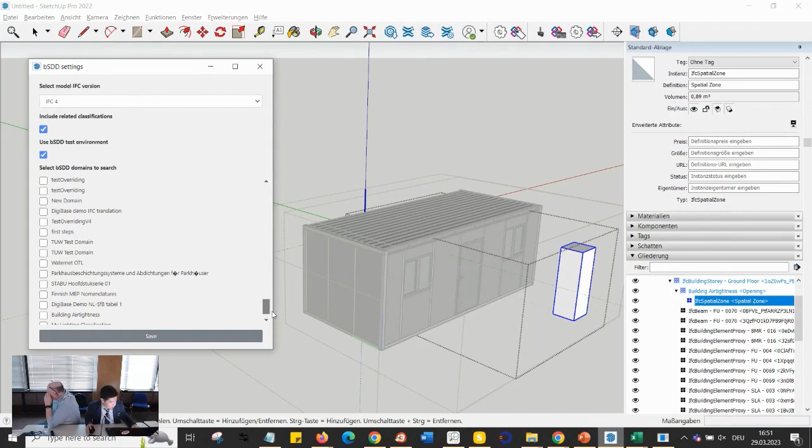Okay. Then the last example: it was everything about IFC, and I will bring this building airtightness, just so that you will see how it looks outside of the IFC schema. As you can see, I found it. Groups, and all the standards I linked together, like I mentioned before. Is the other Uniclass here? There are other examples from NBS, and I said that this is related to IFC window, door, wall, roof, and all that.

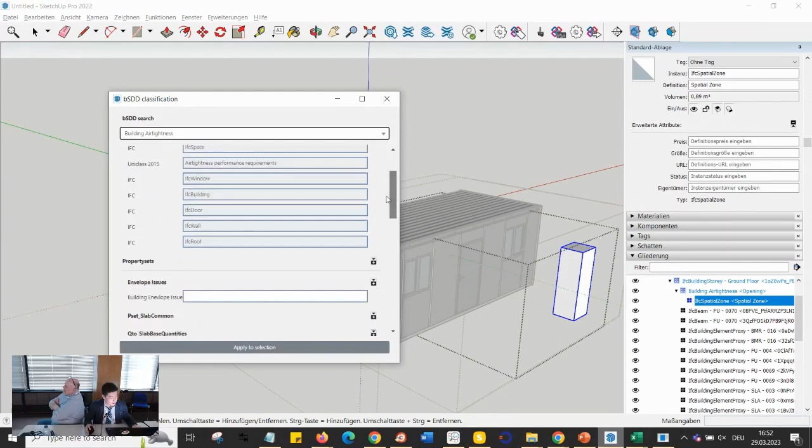And of course, as soon as you choose that, their property sets will automatically come with it. It's implemented that way, but some improvements are expected now. And this is my building envelope type issue. Do you remember, issue like, let's say, crack? I have my crack there, and we are all done.

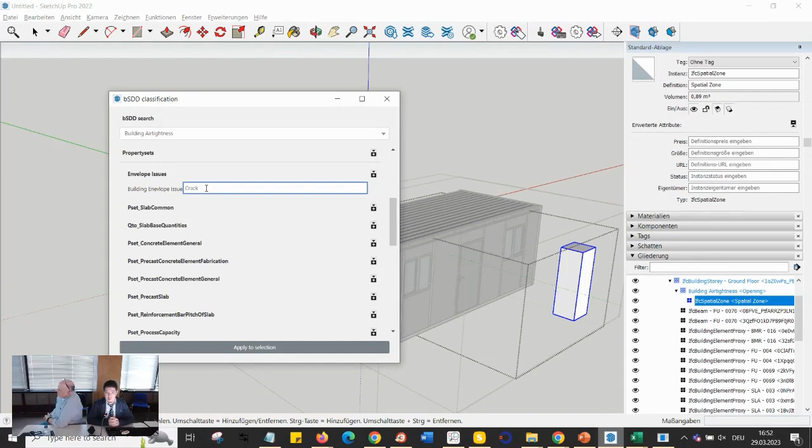And thank you for joining us. Thanks to Mirbek and David and to Arta for that excellent demonstration of how to use IFC. It was a container building, but it did have elements of a kitchen in it as well, just to be precise on the area that we covered, but it was great.